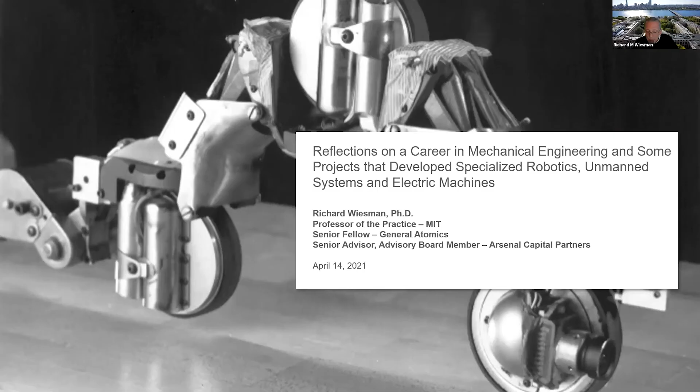Well, thanks very much, Brian. Let me go through, let me do a few adjustments here. I think we're okay now. Does that look all right to everyone? Good, good, that's good, coming through. Thanks very much. As I told Brian, I had a last minute equipment failure and had to move a few things around, but better that the failure occurred then than now.

So let me get going on this. As you've already heard, I did my bachelor's and master's and doctoral work all in mechanical engineering right there at MIT. And towards the end of my...

Let me just get up here. Having a little issue here with the presentation mode. There we go.

Towards the end of my doctoral thesis work, my funding was running out, so I decided to take on some consulting work. For me, that was a very good decision. It gave me a chance to put into practice some of the work I'd been doing in control theory, and some of the things I'd learned along the way. I was now able to do some work in design and mechanics and other areas I had studied. It was all around a good move for me.

One of my first clients was Foster Miller. That's a company that was started about a generation before me by three people who came out of the mechanical engineering department at MIT. At Foster Miller, I was literally like a kid in a candy store.

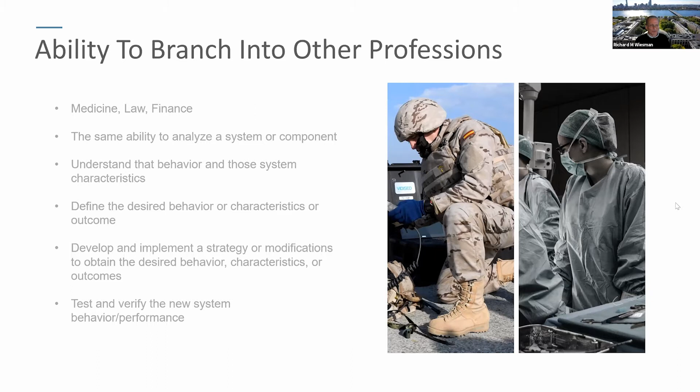After the first day, the judge asked if he could talk to me afterwards. You know, they have you fill out a little bit of a resume as part of jury duty. And he said he saw I'm a mechanical engineer, and he wanted to tell me that he started out as a mechanical engineer. Then he got interested in intellectual property law and went into that, and one thing led to another, and he was now a judge. So that was a great example of how mechanical engineering served to branch into another profession in a very logical way.

As I mentioned, some of my earliest professional consulting work was with heavy machinery and mining equipment. Could there be a better area for a new mechanical engineer to start their career, with heavy machinery and lots of power and energy and challenges in mechanical design and controls and materials? It was kind of amusing to me that in that business, steel plates up to 1 inch thick were referred to as sheet metal. So it was a fun way to start out, and an interesting one.

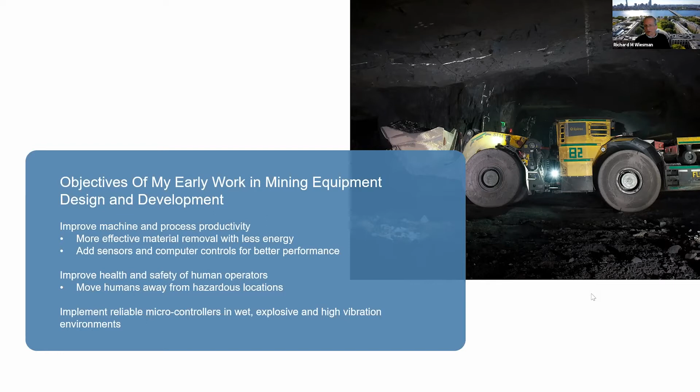Some of the objectives of my early work in mining equipment design and development included improving the overall machine processes and productivity, more effective material removal using less energy, and adding sensors and computers - embedded computers, which were pretty new at the time - for better control and performance. A big part of it was improving the health and safety of the human operators, moving them away from the hazardous mining face to safer locations. And a big part of all this was implementing some of the early and powerful microcontrollers in a reliable manner in what were often very wet, explosive, and high vibration and shock environments.

There were some lessons learned in that early consulting that I'd like to pass along. First, without careful management - and this applies unless you can take on pure technical roles, which tends to require program management in anything but the smallest, most narrowly defined tasks - you find that schedules will quickly get out of hand if they aren't carefully managed. You also find that in general, costs require careful management, and that's a big part of program management, to keep costs under control.

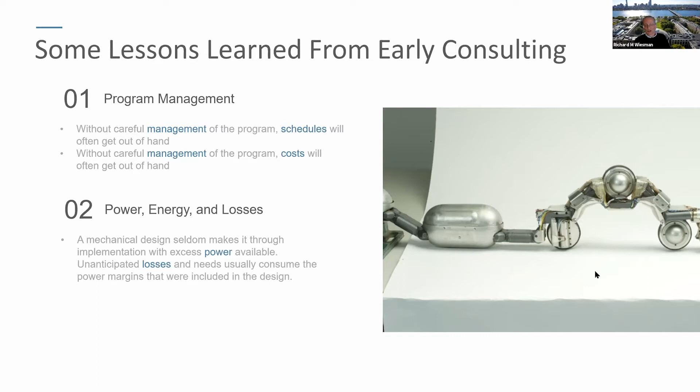I often tell my students, and I mean this seriously, you start out with a mechanical design that may seem to have generous margins for power and energy available, but I almost always find that those margins get eaten up through both unanticipated losses and unanticipated new needs for consumption of energy that come into play. So I often like to say you never seem to have enough power and energy available on these designs by the time you get to the end.

Finally, customer feedback. Validation testing of mechanical hardware can be a very, very humbling experience - and I'm sure a few of you are nodding out there. Hardware can be very humbling. Users and customers need to provide feedback, and they generally will. It's good to have a thick skin and keep an open mind during these stages of a program, because after all, a project is only as good as the market acceptance it will be able to gain.

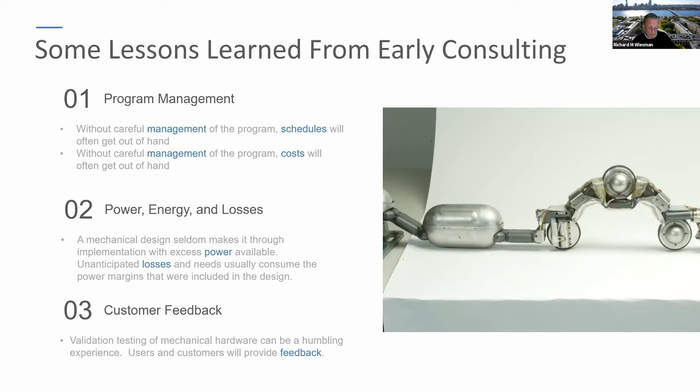As I mentioned before, I wanted to show some examples of two specific business areas I was fortunate enough to found at Kinetic and Foster Miller. The first deals in special electric machines and actuators, and we've done a number of those over the years - some very small, some very large, some to work in very hazardous environments. I'm really quite proud of that business area and the work we did.

But as I mentioned, it started out with what I learned in my doctoral thesis. It led me to one of the longest projects of my career and one of the most interesting. My doctoral thesis was called Experimental and Analytical Characteristics of Linear Induction Motors for Transportation.

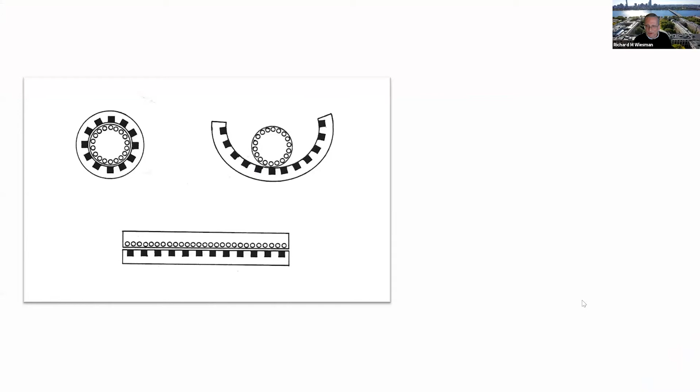To start off, let's talk a bit about some of the fundamentals of induction motors and what a linear induction motor is. So bear with my rather crude sketches here, which are actually things I took out of my thesis. Here's what might look like a cross-section of a very conventional squirrel cage induction motor. These motors comprise the great majority of all electric motor horsepower in use today, because they are so rugged and so simple. You have a stator, an iron stator with teeth on the outside, and multi-phase windings that rest within those teeth. When they're energized at a given frequency, they produce a moving magnetomotive force wave that passes around it, depending on the winding configuration and the speed.

And then on the inside, you've got an iron rotor with these embedded conductors. They can be copper, or to save money, they can be aluminum. This is often called a squirrel cage rotor because it has that look of little bars.

If we take that and start cutting it and unwrapping it, as I've tried to show here, you can see how you can transition to a linear version of the same motor with the stator, or what we call the primary, on the bottom, and this what was the squirrel cage, or the secondary, with those conductors on the top.

The beauty point in induction motors, one of them, is that they're made with very simple materials. There are no brushes, no permanent magnets, no rare earth materials. They're very simple, rugged materials.

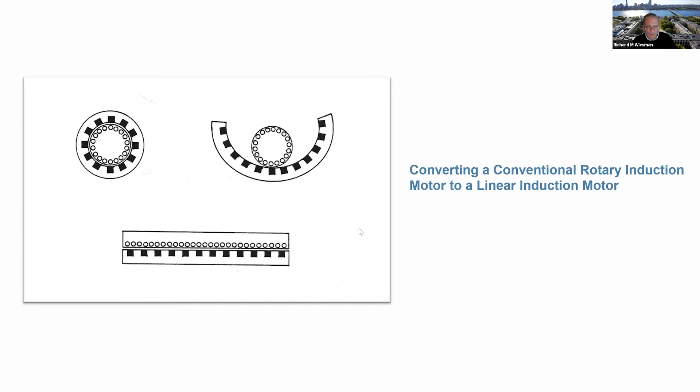For the work in my thesis, I was looking at transportation applications. So I was looking at the short primary here, which might be the train, moving along a track that would be a continuous secondary. Here we've also made a transition for this so-called single-sided linear induction motor to a secondary.

Where the squirrel cage bars are gone and we've got a sheet conductor here, typically aluminum to save money, just as going to the sheet conductor instead of the squirrel cage is a cost-saving thing, because this is the track that will go on a very, very long distance.

The penalty we pay for going to a sheet conductor is basically the air gap gets bigger. So we've got a forced flux over a much larger air gap, whereas before the air gap went from the iron tooth to the top of the iron of the embedded conductor. Now it goes all the way to the back iron, you can see here.

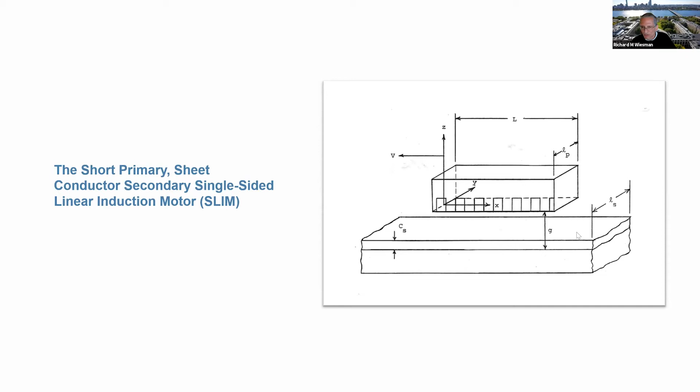Let's talk about a couple of variants of the short primary and short secondary slims here. So here you see simply a short primary moving along what could be a very long secondary, or we can go the other way for particular applications and have a much longer primary with the actively powered windings and the passive short secondary moving along that.

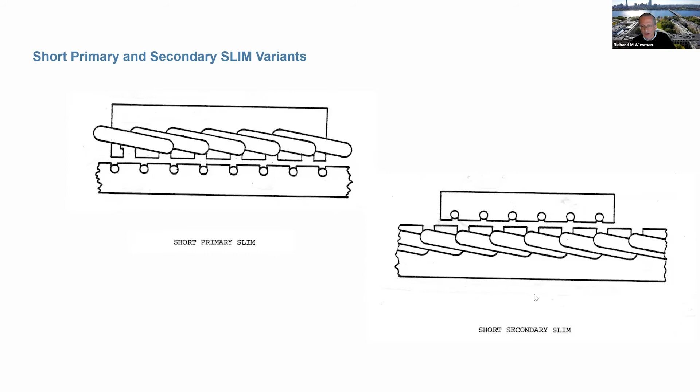Here's three interesting examples, and I think this will start to point out why this looked like a good way to go, and proved out to be a good way to go for the aircraft launching problem. So here we see the short primary and the long secondary with a sheet secondary conductor.

Now here we see the primary, we've detached the back iron from the secondary, so it can remain stationary and in line with the primary. And only the conducting sheet, which could be fairly low mass aluminum, now is moving with respect to the primary. You can see that we've got a little bit bigger air gap, but we've still got iron on both ends to complete the magnetic path here, and that helps.

And why might one only want the sheet conductor to be moving, the low mass end to move? Well, think about the application for launching aircraft. We've got to accelerate and ramp up pretty fast, and then in a much shorter distance, we've got to bring that motor to a halt. So it's kind of nice to have a very low mass moving item at the end where you have to bring it to a halt.

Down here, for certain special applications, we're willing to get rid of the back iron altogether. And the problem here is that we're paying the price for having the flux take a very high reluctance path, moving so much of the flux through air here.

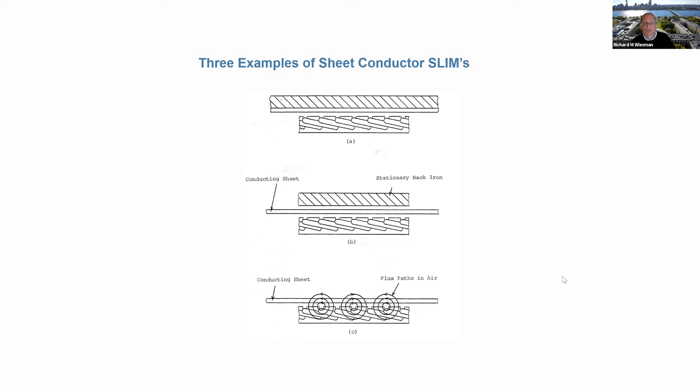Now, let's just talk a bit about the characteristics of an induction motor and why they weren't particularly popular for use in applications where one needed to carefully control force or speed. So here's a typical torque speed curve for a typical induction motor.

At stall speed, you've got the most slip between the non-moving rotor and the moving magnetomotive force. So that's the torque that's generated at zero speed. It peaks to a high torque, often called the breakover torque. Down here at synchronous speed, of course, no torque is generated because the rotor would be moving at exactly the same speed, moving with the magnetomotive force waves, so no currents can be excited in that moving rotor.

And most of these applications all over the world that use big induction motors are kind of working in this region. So for a 60 hertz driven machine in North America, a typical synchronous speed might be 1800 RPM, depending on the winding configuration.

You'd have a lot of these motors driving big fans, pumps, or compressors, kind of working in this region, maybe 1700 to 1750. If that motor took on a slightly higher load, it would slow down a bit and the torque would come up to match the load. If the load dropped off, it would speed up a bit. This would sort of be the typical working region.

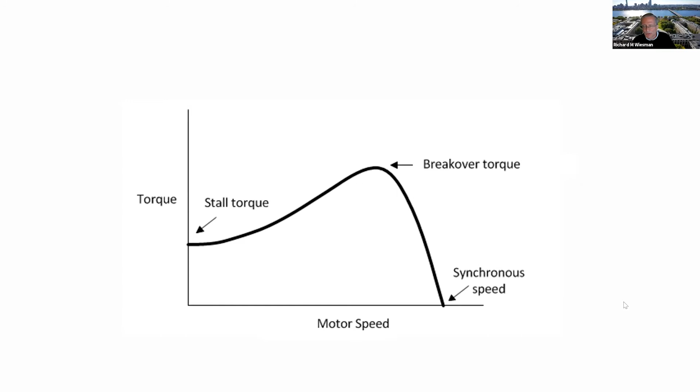So you can see that the control process can seem to get a bit complex as compared to controlling a synchronous permanent magnet machine or a separately excited synchronous machine.

So what was the Navy looking for at the time? Well, they were looking for smoother acceleration that would put lower stresses on the airframe. They were looking for capabilities to reject disturbances. They wanted true closed loop control. What kind of disturbances would you see on a flight deck? You could see motions of the ship, waves breaking, wind, jet blast from adjacent aircrafts, all of those things. So they wanted closed loop control and the rejection of disturbances.

Lower life cycle costs, a big issue. Carriers are built typically for a 50-year life or greater, and this equipment had a long time, a lot of use. So anything you could do to reduce the regular costs of maintenance and operation would be greatly expanded over the life of that system.

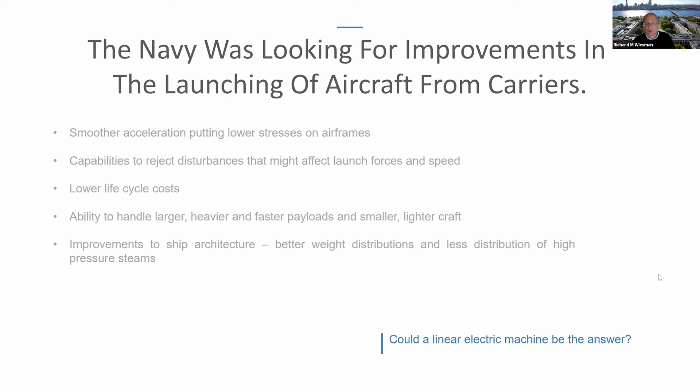They wanted the ability to go to heavier, larger, and faster payloads, and smaller, lighter craft like unmanned aircraft. Finally, they wanted overall improvement in the ship architecture, better weight distribution, less distribution of high pressure steam systems, which of course can be very hazardous and very heavy. And the question was, could a linear electric machine be the answer?

Once again, I was back writing proposals with a group of folks. We started writing proposals, and after a number of successful programs in which we demonstrated linear induction motor-based designs and control of those designs, Foster Miller teamed with General Atomics, and we went on to win the Electromagnetic Aircraft Launch System, or EMALS, design and development contract, and we also went on to win the Advanced Arresting Gear, or AAG, design and development contract. Today, General Atomics remains the prime contractor for these systems on new U.S. Navy carriers, and QinetiQ, formerly Foster Miller, remains an important contributing partner.

I just wanted to say a word about what some of these programs looked like that we started off doing. One was called the Electromagnetic Aircraft Arresting System, or EARS, which you see here. As you may have seen in movies like Top Gun, the way these aircraft land on a carrier is they have a hook that drops down in the back of the aircraft, and they hook one of typically 3 cable pendants draped across the flight deck.

Those cables are reeved below the deck to systems that provide braking and damping of that energy to bring the aircraft to a halt. Here you see a system we built where we used linear induction motors on either side to control the braking on the sides of the pendant. In this case, we're firing about a 200-pound scale model aircraft out of an air cannon at different speeds, different angles, and different offsets.

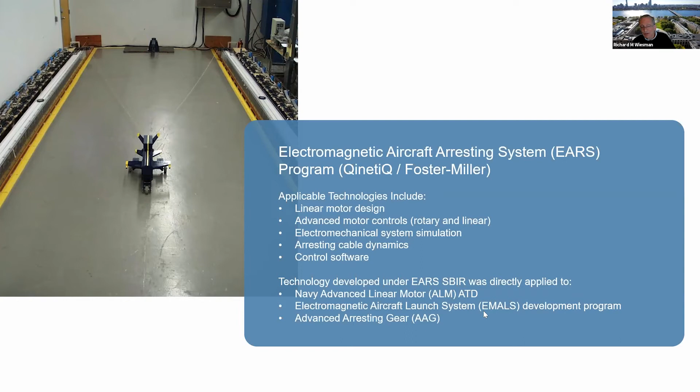Programs like this, where we demonstrated the performance and controllability of these linear induction motors, fed directly into the Navy's Advanced Linear Motor, or ALM, program, and that fed directly into the Electromagnetic Aircraft Launch System, or EMALS, which, by the way, is a Phase 3 SBIR program, and to the Advanced Arresting Gear, or AAG, program today.

A couple of things about what's gained by EMALS and AAG. Well, increased capability, launch weights that are higher, greater margins, lower life cycle costs, much higher availability and reliability, which translates to greater safety, better compatibility for the more electric ships that are demanding more and more electric power for communications and other activities. Very consistent performance, goes back to that closed loop control.

System readiness and responsiveness, ready to launch in a matter of minutes instead of sometimes a matter of hours that steam systems can require from a cold start. Improved energy efficiency, order of magnitude improvement in the launch efficiency. Reduced requirements for certain ship auxiliaries. For instance, 37,000 gallons of water are saved per operational day. Improved shipboard quality of life, a much quieter system, and an overall ease of operation and maintenance. We're talking in general about changing out electronics and boards as opposed to doing work on heavy steam systems.

Today, over 7,000 launches have been completed. That may be a much higher number now, in fact. The controllability has been excellent. It's been a 100% safety record, and testing has gone on in operation in all sorts of weather conditions. I want to go on now with a very quick video. It should be under 2 minutes.

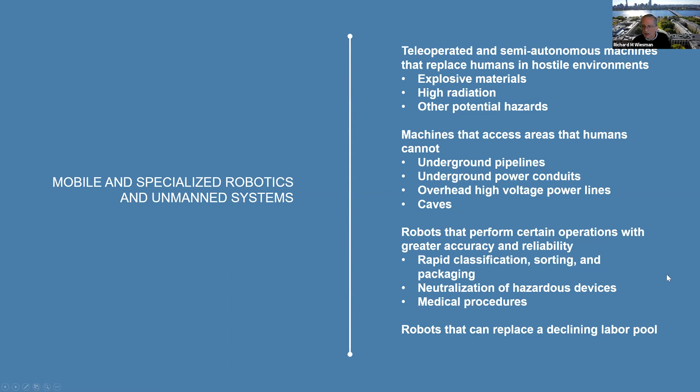Some are examples of robots that can perform certain operations with greater accuracy and reliability. Things like rapid identification and classification of items, sorting and packaging, neutralization of hazardous devices, and of course, even though I'm not going to show any of these, devices that perform various medical procedures. In many cases, particularly in some of these commercial environments, they're robots that are replacing a declining labor pool because of changes in the North American economy. They're working in areas that people simply choose not to work in, and the labor pools are declining, and there were other things needed to replace that.

The first project that started it all was the Ramrod, or Ferret, which was the civil version of the explosive ordnance robot, Ramrod being the system developed for the Department of Defense. Ramrod stood for Remotely Actuated Mobile Platform for Render Safe Or Disposal. It was a procurement out of the NavEOD Tech Center in Indian Head, Maryland, which for many years handled all of the development of EOD equipment and robots for all of the Department of Defense.

As I mentioned before, the system had to be highly mobile, climb stairs, and work on really tough surfaces like sand and mud. It had to have this long reach manipulator, which telescopes. In this case, we chose to go to a telescoping manipulator that goes from 3 feet to 11 feet. It had to be capable of supporting 200 pounds plus at full extension and being able to tear down suspended ceilings for inspection.

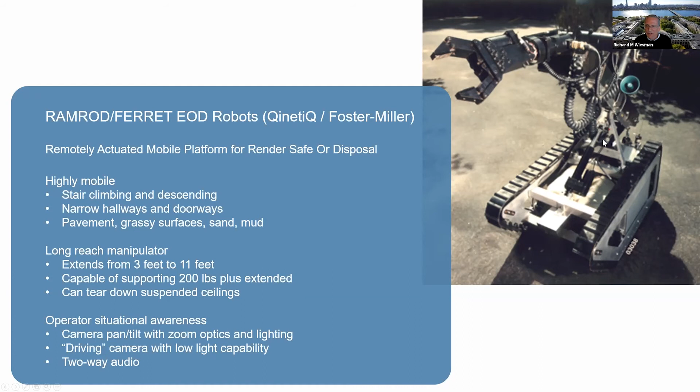Using cameras that had pan and tilt and zoom optics and lighting. The cameras are going to look kind of large in this, but that was the state of the art at the time. And a driving camera that you can see down below that had low light capability, and other sensors like two-way audio to be able to listen to things or send messages out. The system had to be highly modular. You can see an example here, where the camera pan and tilt is being moved from a stationary position on the robot out to the end of the arm. In that previous picture, you might have noticed the end effector.

Was a high force clamping end effector, which had 1,000 pounds of gripping force on parallel jaws and 1,000 inch-pounds of continuous roll torque in either direction. That was designed for our customers that wanted to be able to disassemble 4-inch pipe bombs, so it had the capability for forensic work to attempt to remotely disassemble these pipe bombs. It also had a large capacity end effector.

This one made for capturing very odd shaped large boxes and other items. And then there's a very small end effector with a compliant centerless wrist, used to hold keys, even car keys, that it could gently insert into car door locks or trunks to open them, or for grasping small locker handles and opening those.

And you can see the pan and tilt up there. It also carries a couple of different types of door stops on the rear, so it could stop a door that it had gone through and keep it from closing behind it. And it had to be compatible with a variety of EOD tools.

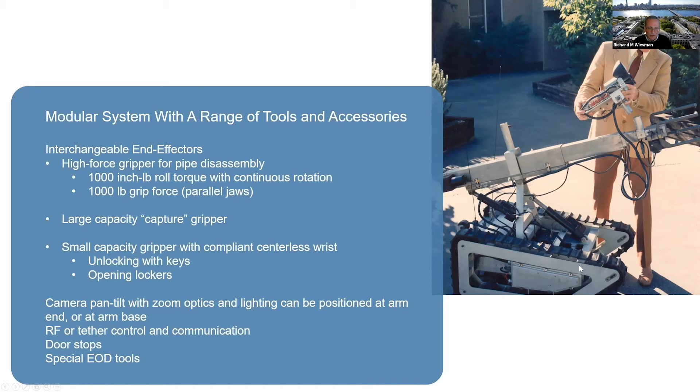Here you can see this manipulator arm can unlatch with just 4 quick latches and be taken off in a matter of seconds and replaced by various other EOD tools. This was a photo to show the 5-stage telescoping stainless steel arm. Without the end effector, this arm weighs only 66 pounds with its actuating motor.

And here you can see that at full extension, it's lifting the front of the robot, which weighs in at about 430, 440 pounds in this configuration.

Finally, the Ferret actually became a TV star for a while. You can all Google this and see an old show that NBC had called True Blue, about the emergency services unit of the New York Police Department. They had purchased and used a number of the Ferrets for hazardous operations and hazardous material handling. This got picked up on, and one of our Ferrets became a TV star. They gave it a name, Sammy. I'm not sure why. And today, Sammy is retired and resting in my office at MIT.

So after we get through the pandemic, if somebody wants to come and visit Sammy—and some of you have probably already seen Sammy around—a number of students over the years have used it to explore the mechanisms, the drives, and the way things were fabricated.

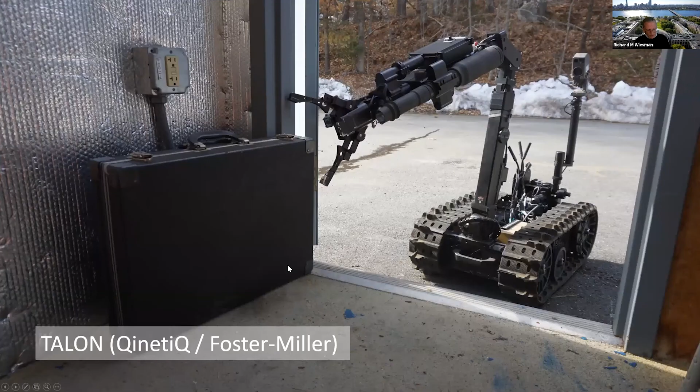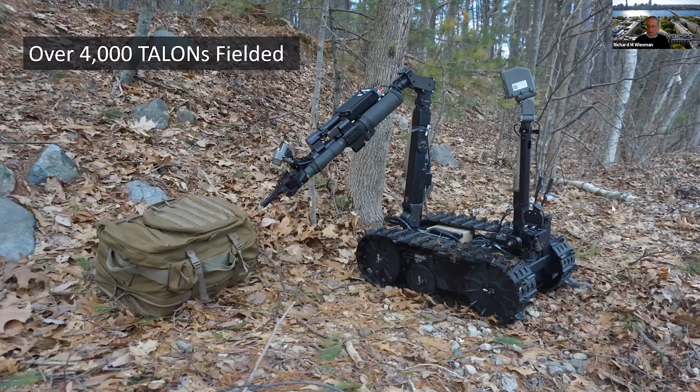Moving on to some other EOD and hazardous duty robots that came out of Foster-Miller and QinetiQ. This is the real workhorse, the Talon. There have been over 4,000, close to 5,000 Talons fielded worldwide. While I didn't have much to do with any of the technical development of Talon, you can see that much of it is a very natural outgrowth of a lot of the mechanisms that were in the larger Ramrod and Ferret systems. High degree of modularity, many special cameras and sensors, a variety of different manipulator arms and end effectors, and different EOD tools can be used. We're quite certain that Talon over the years has saved many, many lives and prevented many, many serious injuries by taking the place of a human in hazardous environments.

Talon is equally capable of handling very rough terrains and settings, with a variety of end effectors for approaching a variety of objects and payloads. One of the other great points about Talon is that even though these devices frequently get damaged, sometimes heavily, in the field—doing exactly what they're supposed to be used for as teleoperators, taking the place or providing that longer reach for the human operators—Talon is remarkably good at being field repaired and rapidly repaired. Often in a matter of minutes or sometimes a few hours, you could have one completely back and running and supplying that important capability.

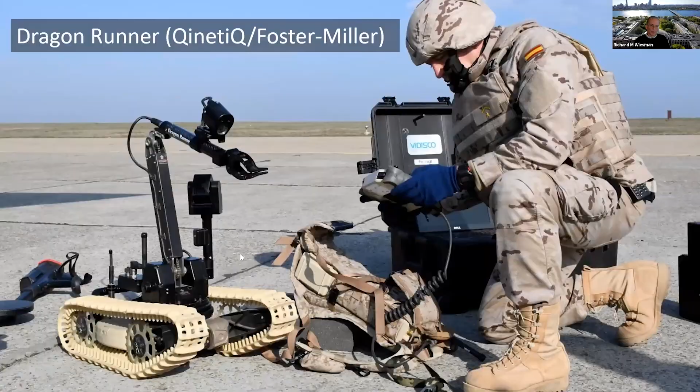Here's another very small device, the Dragon Runner from QinetiQ Foster-Miller. Obviously something much smaller, something that can be easily picked up and carried. Very good, and again, sold throughout the world. Very good at poking around and doing surveillance and employing light manipulators for picking things up or looking around at things. Another powerful tool—again, one that I didn't have any direct input on the technical design, but an important product I wanted to point out.

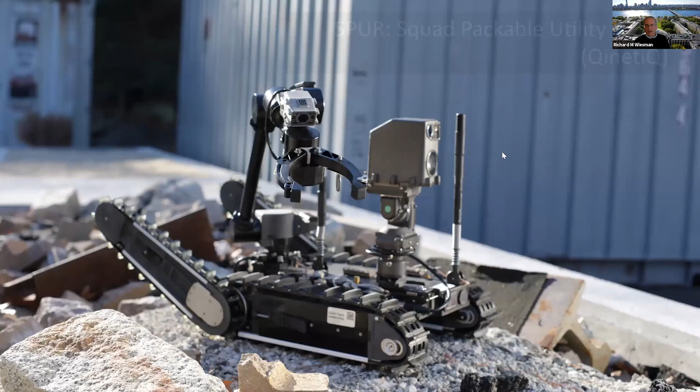And finally, the newest is the Spur, or Squad Packable Utility Robot. This is a very, very new system, quite small, and you'll see some photos of it. Highly modular, employing a wide variety of cameras for driving and for looking around, a wide variety of specialized optics, manipulators, end effectors, and other tools on board. Here you can see one on extremely steep stairs, which gives you an idea—Spur is highly mobile, able to scamper up. I can't even call these stairs, but that gives you an idea of how small it is.

I did direct much of the design of this robot. It's a clean sheet design that I'm very proud of. It was derived through processes and iterations of ideation, modeling, analysis, and testing. And I need to point out, these are pretty much the very same processes taught in Dave Wallace's 2.009 class. So to any students that have 2.009 coming up, or alums that took 2.009, I can guarantee that everything you're learning in that class is very much applicable to professional practices beyond MIT.

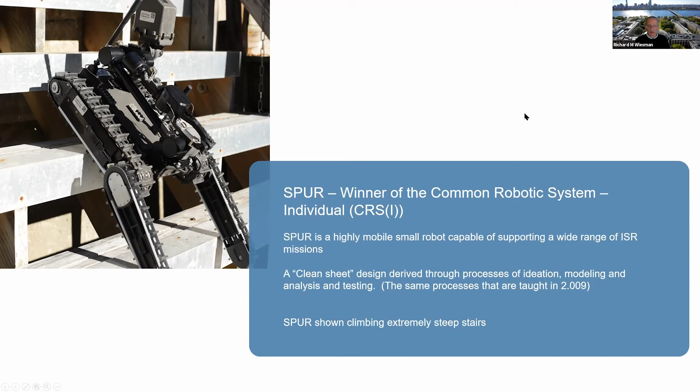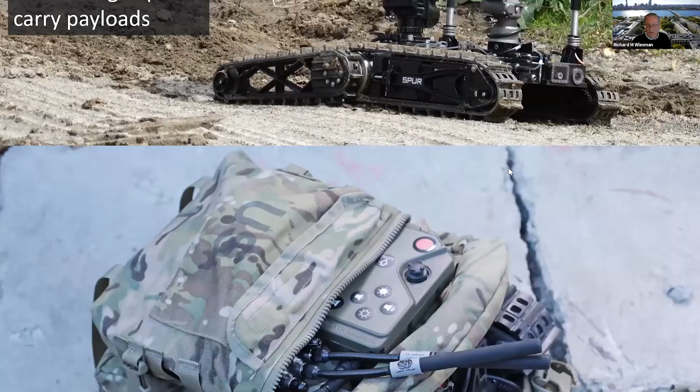I also want to point out that Spur was the winner of the Department of Defense Common Robotic System Individual Program of Record. That was a very significant competition for a program that will potentially field thousands of these robots. Here you can see, even though it's very small, it's able to traverse mud, water, and sand, and handle very tough terrains, rocks, and obstacles. While handling these, it's also able to grasp and carry fairly large and heavy payloads.

Spur's a real transformer in the end, and this is part of the mobility. Here, in literally seconds, it folds down to a very small flat pack. For those familiar, this is a MOLLE 2 pack. If you aren't familiar with this size, it's much smaller than the backpacks most students carry around MIT. So it truly is backpackable, and it can fold down without tools. In a matter of seconds, you can do this by hand very easily. You could do it in the dark if you were even slightly familiar with it.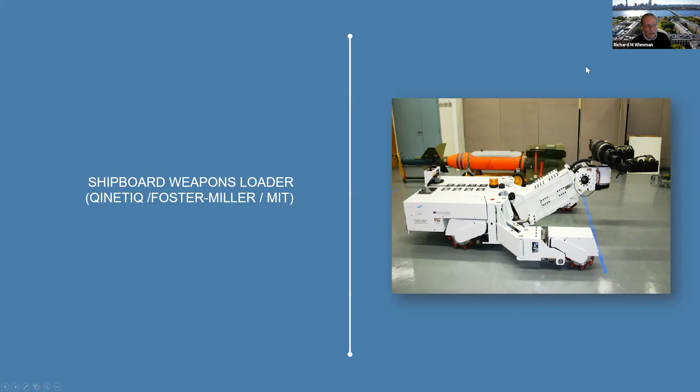Here's an interesting robot, much bigger, that MIT was part of the development team for: the shipboard weapons loader. Here's the problem before we get into it. Loading fuel pods, payloads, and weapons on a flight deck, which may be in day or night conditions, rough weather, cold or hot. A lot of these operations are largely carried out by hand, with lots of people helping to lift and position these devices in what may be a pretty tough environment.

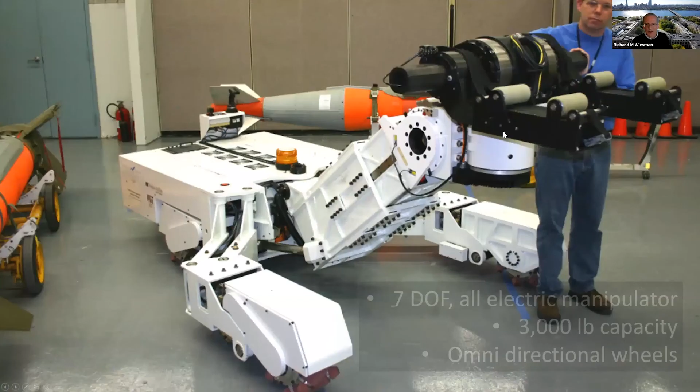So you can see what's going on here. The answer to this was the shipboard weapons loader. Here's a laboratory prototype, and you can see the size of it. It's a true cobotic system, which amplifies and provides safe holding for the operator. MIT did the admittance controls that prevent the system from jamming up some of these payloads as they're loaded, or doing any damage. This is a 7 degree of freedom, all-electric manipulator, because hydraulics are not permitted in some of the environments it operates in.

It has a 3,000 pound capacity. For comparison, a similarly sized industrial manipulator might have more of a 300 to 500 pound capacity at the same size. It operates with omnidirectional wheels, so it can rotate in place, squirm left, squirm right, go forward or backward, and position itself going over chains and cables on the flight deck. So, very mobile, very useful tool.

Moving into commercial space, this is called the box handler robot. It's made to work in flow-through storage facilities, which is by far the most common warehousing facility. This picture happens to show a facility with no boxes or pallets present, but what happens is boxes come in, in this case 2 different size boxes, on a conveyor. Labels get read by the robot, or by human operators if present. The boxes get carried over to the right bins, stacked on the pallets. When the pallets are full, they're released and gently roll down to the other side of the storage system, called the picking side, where the opposite takes place. To fill orders, these boxes get picked off the other side of the storage facility, go onto conveyors, and go out for transportation or whatever's required to fill the orders.

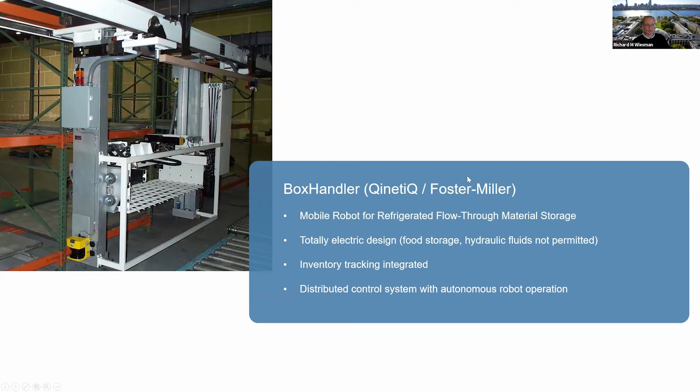Here is another one called the RoboPacker. By the way, that box handler was directly addressing the problem of a workforce that simply was disappearing, so it needed to fill in for people that they simply couldn't get anymore for those activities.

The box RoboPacker was doing much the same thing. This was working in the food type business, handling over 120 different agricultural products. The products it was handling were varying in size and weight slightly. It had to come in and weigh each product and identify what the product was.

You see 2 stations here. It could handle up to 2 different sizes of boxes. Can't see the robot manipulator here, but it used a very squishy air bladder type end effector, so it could very gently grasp these products and not damage anything.

Some of the boxes were to be packed by a piece count strategy, some were to be packed by a weight optimization, so it was weighing, identifying, and counting all the time. This was being used in a food plant that had to be compatible with wash down every 16 hours using high pressure water and caustics. Again, it was performing in some cases an operation more efficiently with fewer errors than humans, but most importantly, it was taking the place of a workforce that was rapidly disappearing.

And the final robot I want to show you very quickly, I promise, will be the Pipe Mouse, which is a semi-autonomous robot. You can look up the patent yourself. It is a fundamental patent that's almost always cited by other patents now for internal pipe inspection.

It was sponsored by the Gas Research Institute. It was designed to work in 4 to 6 inch nominal pipe sizes, and if we consider all the materials it had to work in, that's 3.1 to 6.4 inch IDs, handling all the fittings, blocking no more than 50% of the live gas lines at any point in time, having to work in what may be flooded areas and old cast iron piping.

It was sending continuous video transmission and receiving high level commands through a fiber optic tether that was paid out. Other robotic inspection devices are typically heavy tractors that drag tethers into the pipe. They're usually limited by the friction of that tether, and the capstan equation will rear its ugly head if you try to go around more than a couple of elbows, quickly bringing it to a halt through the friction from going around the corners.

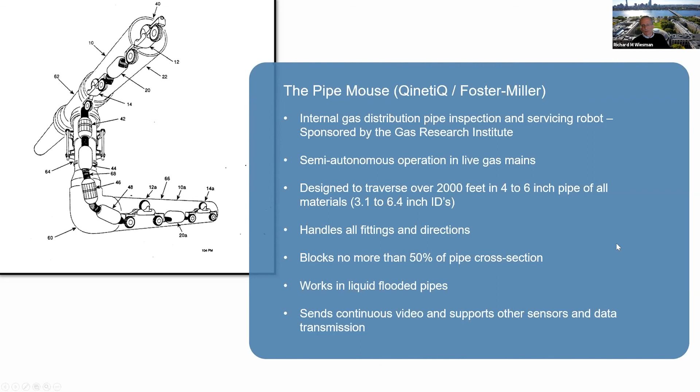That's why the Pipe Mouse carries 2,200 feet of optical fiber, pays it out under almost zero tension, and picks it up as it retraces its steps, cleaning that fiber off and reeling it back in.

The inspection capabilities included things like looking for dents or ovality in the pipe, which would indicate external third-party damage, which is the most common reason for pipeline failure. Looking for any obstructions or collapses, and being able to use things like magnetic flux leakage, ultrasonics, or eddy currents, depending on the material, to look for cracks, gouges, wall thinning, or pitting in the pipes.

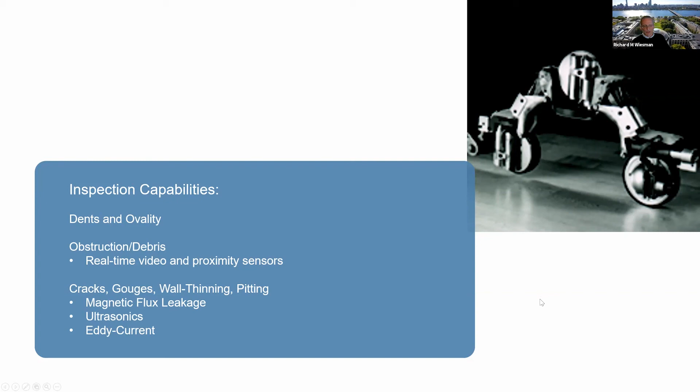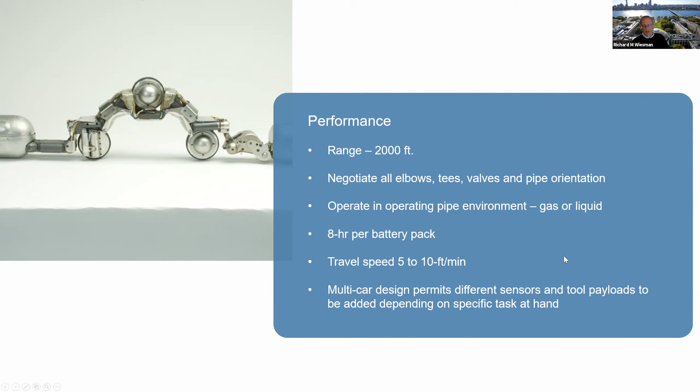I'm going to go quickly here. It would carry a lithium thionyl chloride primary battery pack for 8 hours of operation. Typical traveling speeds were 5 to 10 feet per minute, and had to traverse any of the fittings one might encounter. Here's a picture of one of the laboratory prototypes.

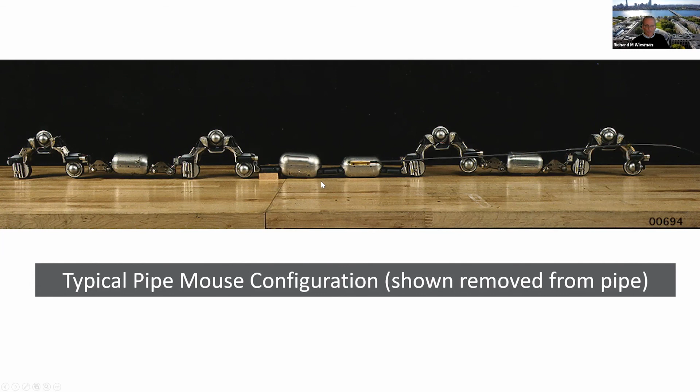Here's a close-up of one of the tractors that I talked about, and pay particular attention to these links we called curling links at 16. These generated a bending torque on the tractor, so it's trying to force this front lead wheel downward. That's how we designed the device to steer in this very rough, disordered environment.

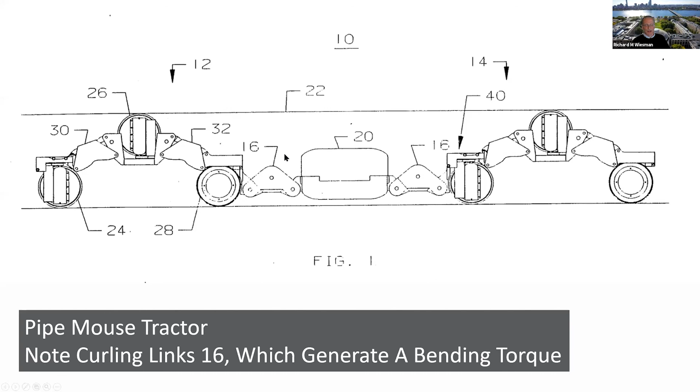So if this was rolling along in this configuration and there was an opening, a T or an elbow going downward, it would take that downward trend. If we didn't want to take that downward trend in a T and wanted to go straight, we would roll the robot over so it's gripping at the 3 o'clock and 9 o'clock positions, and it would pass right through the fitting.

Here's quick pictures of those 3-wheel triads in the minimum diameter configuration and the maximum diameter.

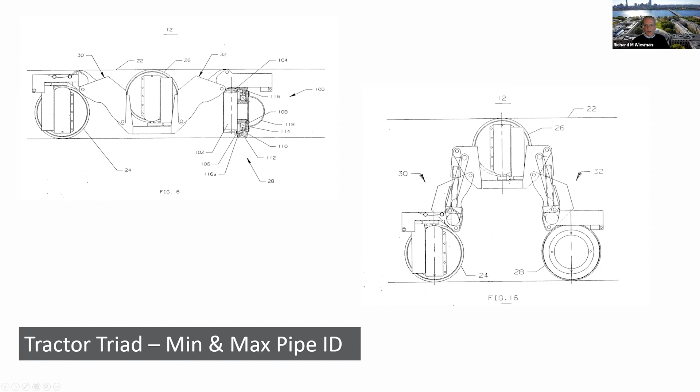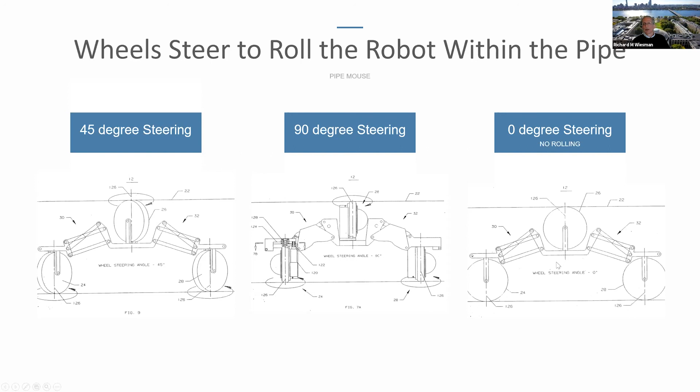How do we roll in the pipe? How do we steer to selectively take turns or not take them? You can see that each of the wheels would turn. At 45 degrees, it would corkscrew down the pipe. If we had to turn very quickly or roll very quickly, we could go to full 90, come to a stop, go to 90 degrees and roll in place in the pipe. Or for taking a straight path down the pipe, we could have the wheels in the usual configuration.

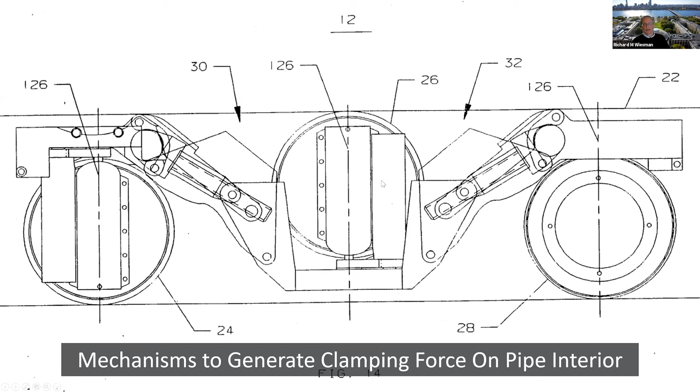The pipe is clamped with actuators that have controlled closed loop clamping of the pipe force. The pipe mouse senses whether it's slipping or not. If it's slipping, it clamps tighter. It's continually sampling the pipe force to see if it can lighten up the clamping force to preserve energy and keep moving with a lower and lower force.

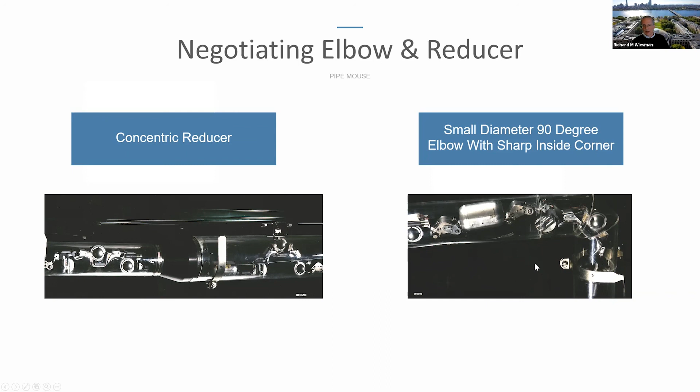Here we can finally see it negotiating a concentric reducer, going from the largest diameter down to the smallest diameter. And here going through a zero radius square corner inside elbow of the narrowest inside diameter pipe. You can see the kinematics and motions it goes through are simply too complex to ever do in a teleoperated manner. That's why it had to be truly autonomous, with just a high level of guidance from the operator.

So finally, I realize I've gone on a bit long. In summary, I wanted to say to any of the students, any recent graduates, or any not so recent mechanical engineering graduates out there, I believe you selected an absolutely wonderful career. You can stay technical, you can transition to management if you want, you can do both. I'm living proof of that. Virtually every project, however, other than the smallest, pure little technical narrowly defined projects, will require careful program management to ensure that you're meeting all of the performance goals, the cost goals, and the schedule goals.

And with that, I will turn it back to Brian.